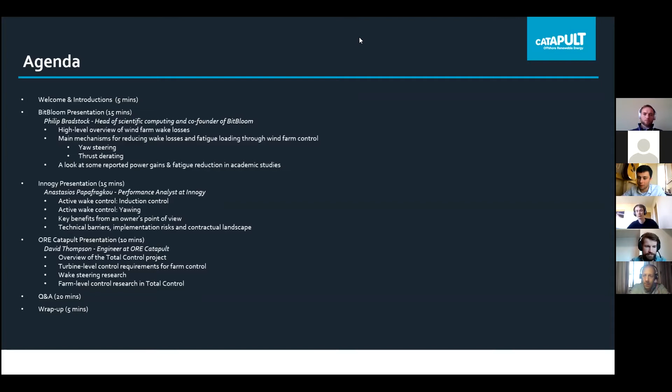Okay, thank you. Hi everyone, good to be talking to you today. Hopefully I just hope to provide a little bit of insight into wind farm control from the point of view of an SME, and more the modeling side of it.

So firstly, just to introduce ourselves - who are we? We're an SME, so you might not have heard of us before. We actually come out of the merger of two even smaller companies, Simmovation and Lindahl Limited. We provide a range of stuff, from software consultancy to operational data analysis consultancy. On the operational data side, we're doing a lot of SCADA analysis and performance monitoring, yield assessments, and some automated analytics and condition monitoring. On our software consultancy side, we're doing quite a lot of modeling in the wind industry, aeroelastic modeling and also wake modeling, helping companies with their numerical modeling and software that they incorporate into wind energy and other renewables.

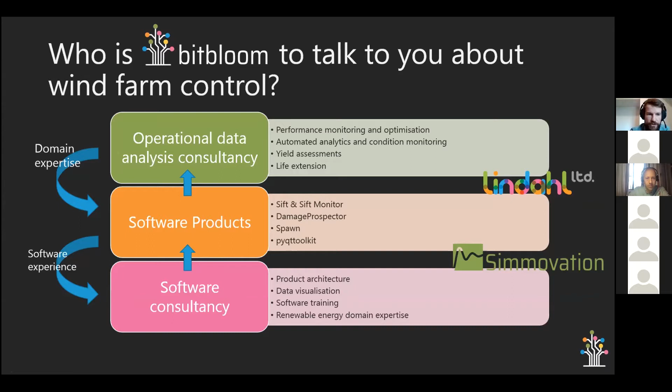So firstly, I just want to give an overview of what wind farm wake losses are, to sort of identify the problem before we try and solve it. When you have operating turbines in a farm, they extract momentum and energy from the wind. And this has the effect that turbines that are directly downstream of those turbines that are extracting momentum and energy will then have less momentum and energy in the wind, due to a reduction of the wind speed.

It's still generally beneficial to locate our turbines fairly close to each other for things like cable costs, and maybe just generally the land you own, or the depth of the seabed, or other environmental factors like that. This means you end up having wake losses that reduce the power in your farm, and the closer the turbines are together, the less power you will have as a collective, or the larger your wake losses will be. Depending on the layout and spacing of your farm, wake losses are typically somewhere in the region of 5 to 20%.

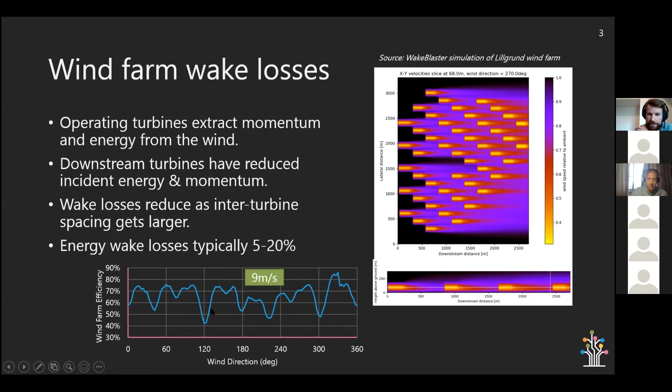But before we go on to wind farm control, I'll just talk a bit about wake modeling and how this is done, mostly for energy assessments at the moment. So when we do wake modeling, usually this is done based on 10-minute average steady state conditions.

So what we do typically with wake modeling is we model at this sort of 10-minute level, and what we call turbulence, we absorb into that wake modeling and absorb it into some statistics, like standard deviation and so on. Aeroelastic models, by contrast, have to model at the high frequency end and see their reaction to the turbulence and so on, and the impact of that on loading.

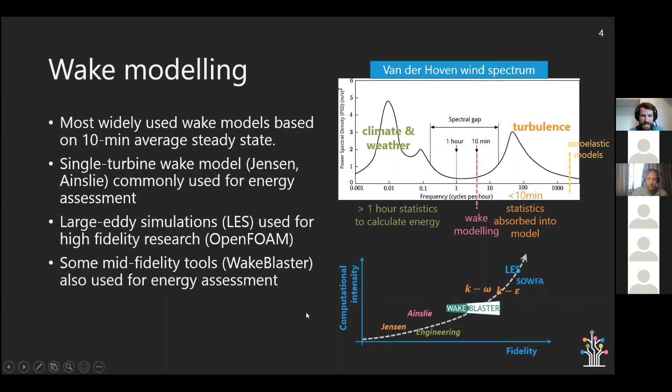And there's also some mid-fidelity tools that model the wake of the whole wind farm together, but are less intensive than LES. WakeBlaster is one example of that.

...reduce the thrust of the upstream turbine. Firstly, I'll point out that the strength of a wake is proportional to the thrust coefficient, or the proportion of momentum you extract from the wind is essentially proportional to the thrust coefficient. So if we reduce that thrust coefficient, we'll reduce the strength of the wake.

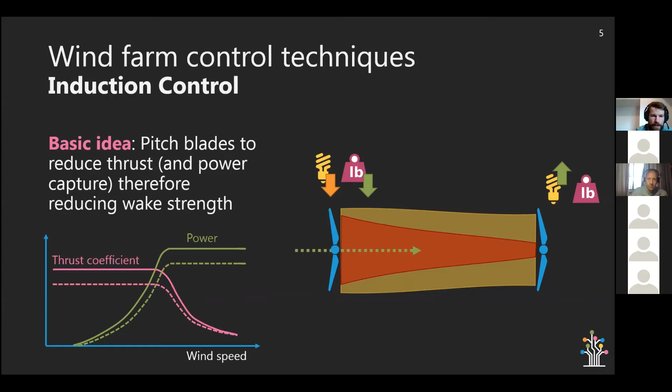So the other main technique, which is becoming more and more the most promising technique, is called wake steering. The basic idea here is that if we yaw the upstream turbine, we can steer the wake away from the downstream turbine based on their relative location to the wind.

So we have a reduction in energy of the upstream turbine due to it no longer being front-on to the wind, and this also ends up being an increase in loading on that rotor—an increase in periodic loading.

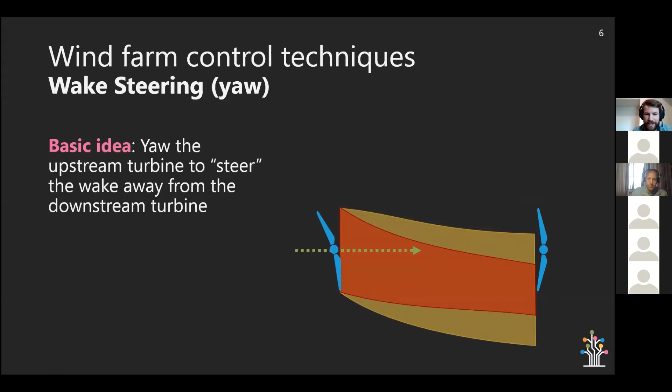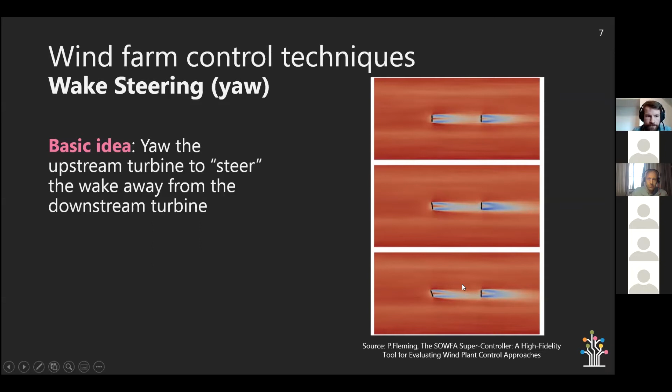Rather than modeling at this 10-minute level to accurately model our wind farm control and see the effects of that, we're looking to operate our controller at a smaller time scale than 10 minutes. For wind farm control, we want to capture the main parts of this turbulence and these large scale eddies, and model this meandering, as opposed to this time-average view which has those statistics incorporated into it.

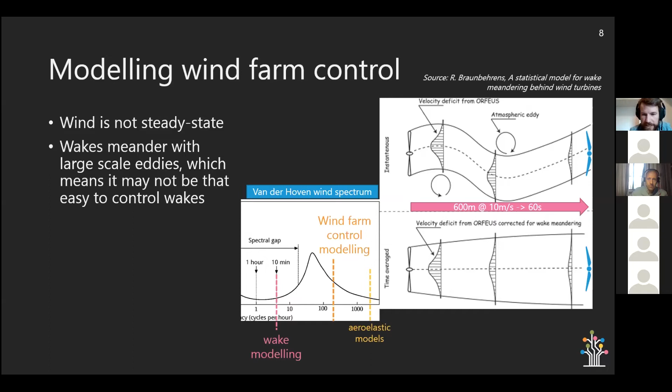We also have to think about the transfer of information. If you consider two turbines, say 600 meters apart, which is fairly typical, and the wind is at 10 meters per second, you're talking about 60 seconds for certain air particles to go from the upstream turbine to the downstream one. So the time lag in this information, the time lag of the wind passing from one turbine to the other, is tricky to incorporate into your modeling and has to be considered rather than thinking of things in steady state.

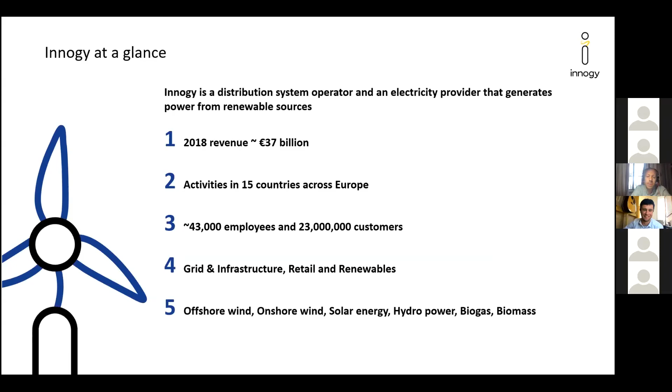Specifically for renewables, we have assets in offshore wind, onshore wind, solar, hydro, biogas and biomass. This is just a snapshot of our operational fleet: 4 main wind farms in UK waters and another 2 in Germany. I've also included a few projects, so the portfolio, the fleet, is expected to grow significantly over the next few years.

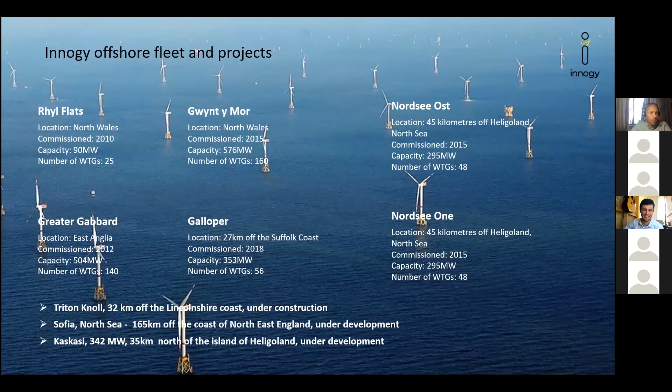I come, as I mentioned earlier, from the asset integrity and performance team. A few words about my team: our main role is to review the SCADA data, vibrational data, and oil and grease data, and we try to analyze the data and identify any issues we see on our fleet, on our turbines.

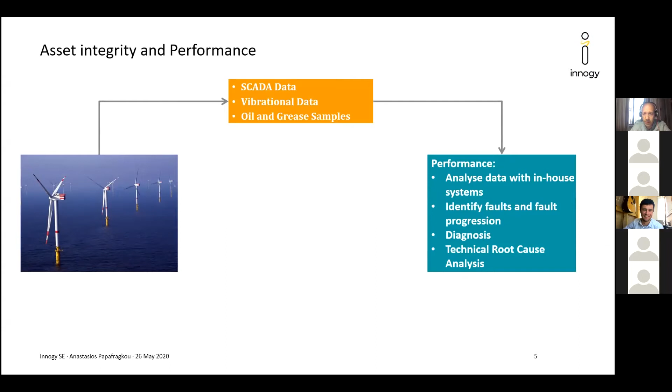We perform a diagnosis, or if we have a failure, we might perform a technical root cause analysis. We feed all that information to the site teams, who are responsible for carrying out further investigations if necessary on site. By working with the site teams, we aim at improving the reliability of our wind farms and the availability of the turbines in order to maximize revenue for the organization.

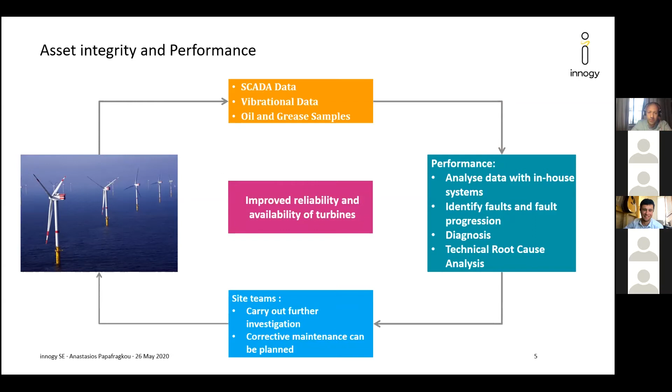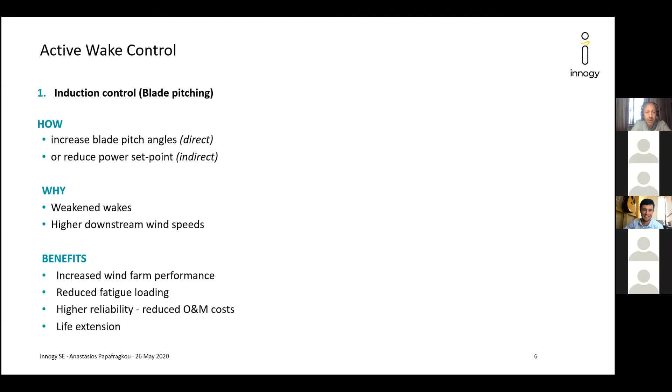I have a couple of slides describing what wind farm level control means. Philip, I think, explained it quite well, so I'll go through these very quickly. One approach is by pitching the blades, as Philip already explained. Why do we do that? In order to weaken the wakes that the downstream turbines perceive, and effectively by doing that we achieve higher wind speeds and lower turbulence for the downstream turbines.

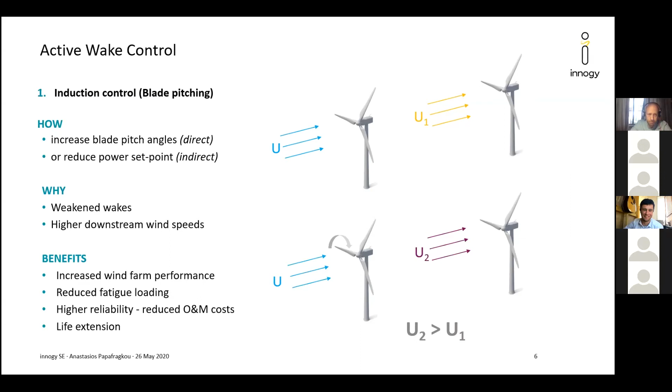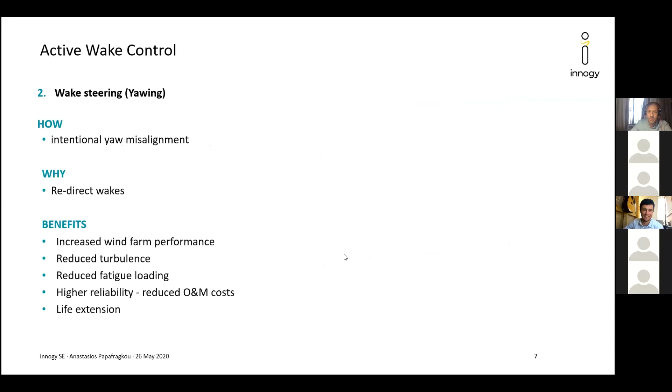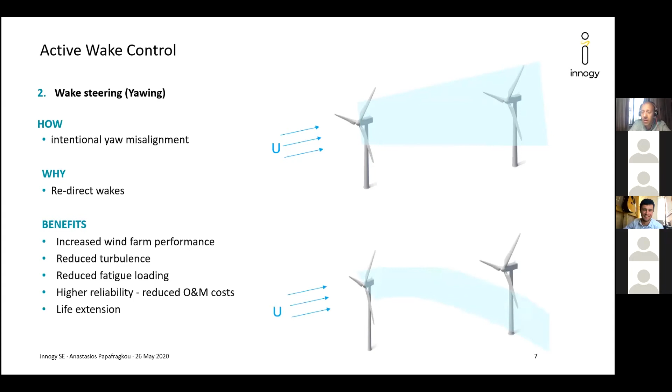A second way of controlling the wind farm more holistically in order to maximize the AEP is by intentionally misaligning the upwind turbines. The objective of this approach is to redirect the wakes. As Philip explained earlier, this is the business as usual case where a downwind turbine is behind the turbine at the front, and it's heavily waked, as you see on this image. But if we intentionally misalign the rotor of the upwind turbine, then we redirect the wake, and the turbine behind it is not as waked as under normal operational conditions.

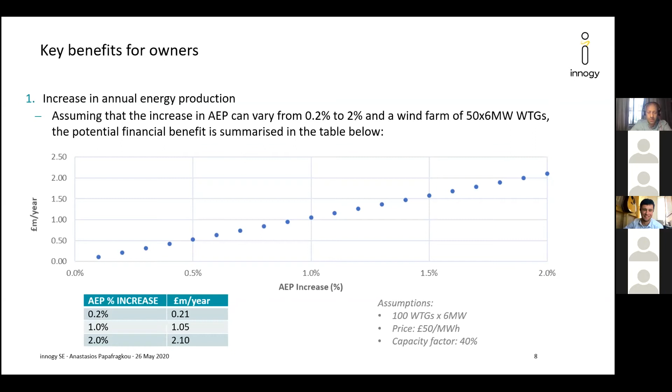If that increase goes to 2%, then obviously the increased revenue goes even higher, up to 2 million. This is a very rough calculation, just because I wanted to give people an idea of how such an approach translates in terms of revenue for a project, for a wind farm.

So the main benefit would be obviously increasing AEP, and the second benefit is the potential reduction of fatigue and extreme loads. This unfortunately is not always the case, but hopefully the sum of loads for the wind farm would be less. For example, in the case of yaw misalignment, we might see increased loads for the first turbine that we misalign by a high number of degrees, but at the same time reduce the wakes, so the turbines behind it should be perceiving less turbulence, therefore less wakes and less loads.

Reduced loads for us as an owner, as an operator, means that we should be seeing in the future increased reliability of our wind farms across our fleet, which translates to less failures, less maintenance, less spare parts, therefore a lower OPEX. Another benefit could be that less fatigue for certain components could translate to lifetime extensions, though this is something we would need to assess at a later stage. And of course, lower loads could also mean leaner design for certain components that should hopefully translate to lower CapEx.

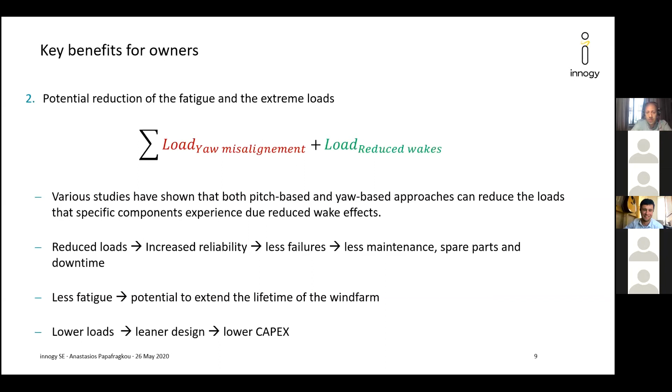Another benefit could be the optimization, the better optimization of the layout by using these holistic control strategies. At the moment, we don't do that, so the layout is designed in the traditional way, without taking into account such strategies. However, if we did, we could potentially end up with a denser layout, meaning less cables, a smaller footprint, and sometimes the footprint is a restriction. So that could be a huge benefit if we could fit more turbines using the same space.

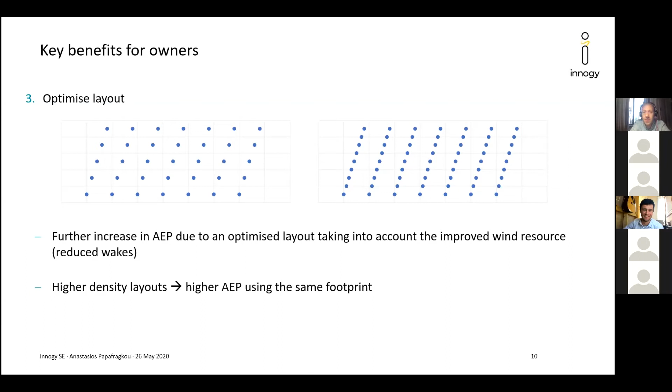I try to list a few technical barriers I could think of. This is more of a brainstorming, to be honest. But from my point of view, I try to review the literature and some of the work that has been done, and I realized it became very quickly apparent that all the models looking into these sorts of control strategies are quite complex, and it seems quite difficult to validate the output of these models by means of having actual experimental data.

So that could be a problem, that we implement these sort of algorithms and we expect a certain increase in AEP, but we don't achieve that.

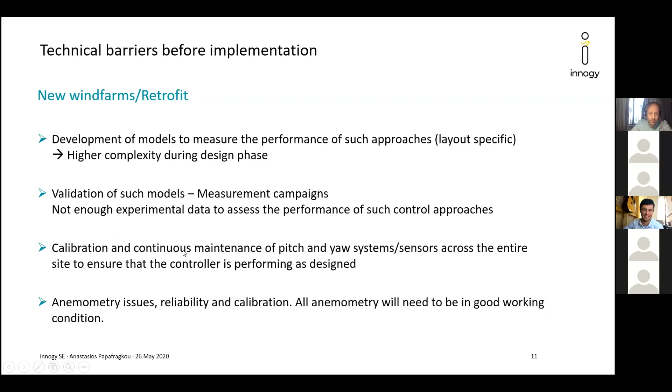Another technical barrier is that we would need to continuously maintain and calibrate the pitch and yaw systems and sensors, as these strategies rely heavily on either of these systems. The same goes with the anemometry - it would have to be calibrated and kept in good working order in order to perform this strategy, to implement this strategy.

Specifically for wind farms that don't come with these controllers pre-installed, but we do a retrofit, there are some more technical issues to consider. For these turbines, for these wind farms, we would have to upgrade the controller. Of course, for that to happen, we would need full engagement from the OEMs, as owners, as operators. We don't have the permissions, first of all, to do anything with the controller, especially during the period when the wind farm is under warranty. But even after the warranty period, we wouldn't have the knowledge to do that. So in either case, we need full engagement from the OEMs.

And in order to monitor and assess the performance of these strategies, we might need to install additional monitoring equipment. That could be LiDARs, in order to measure the wakes, or it could be strain gauges and accelerometers to make sure that the turbines don't perceive high loads and don't exceed the designed envelope.

And the last one is that we would probably need to adjust the operating conditions for critical components. For example, the yaw brake pressure would have to be adjusted in order to cope with excessive yawing misalignment, if that is required.

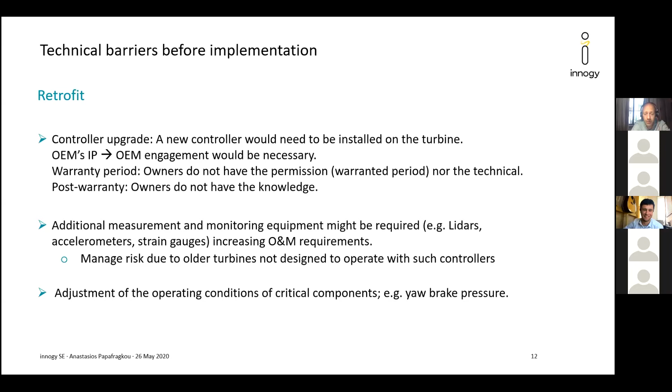Then if we move on to the implementation phase, some of the risks I try to put together. The very first one I thought was anemometry. Very often we see issues with the anemometry. Of course, we can't avoid that. This is something we will be seeing during the implementation of these strategies, and that could be an issue, a problem.

Then another risk is the pitch and the yaw calibration. That would have to be performed across the entire site, and beyond the initial calibration, we would have to make sure that these sensors or systems do not drift away with time. For example, in some cases we have observed that the yaw sensors might drift away with time. So this is something that we would have to monitor continuously and correct any issues if we see any.

And the last one is that the main components that will perceive an increased duty will be the pitch and the yaw systems, and this might have a knock-on effect on some of the subcomponents of the system, such as, for the yaw system, the pinions, the yaw gearbox, brake calipers, or any other subsystem that experiences very high strain.

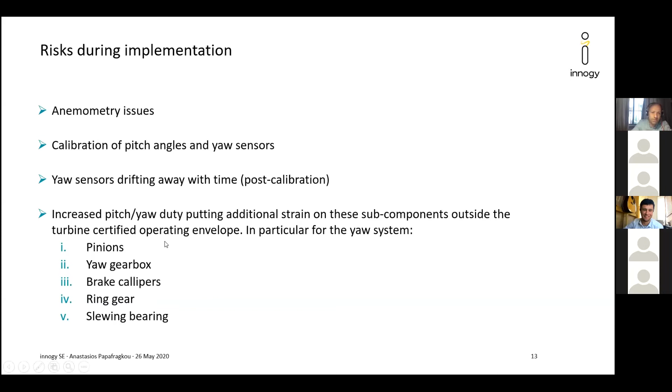Another issue to consider is the additional downtime we will perceive due to technical standbys. A good example is cable unwinding. If we have increased yaw duty, we might have an increased number of cable unwinding events at the same time, and that would cause additional downtime for us.

Specifically for the yaw duty, we might also perceive an increased own consumption. A very rough calculation I did was that roughly a 40% increase in yaw operations could reduce AEP by 0.1%, which is quite significant when you compare it with the benefit we might see from these improved control strategies.

In the case we have high loads, we might see a higher failure rate across the fleet, at least for those subsystems that have increased duty, such as the pitch system and the yaw system. I have to admit the impact on the loads for the turbine, the tower, and the foundation was not exactly clear to me, so there are some concerns about what the impact on the foundations could be.

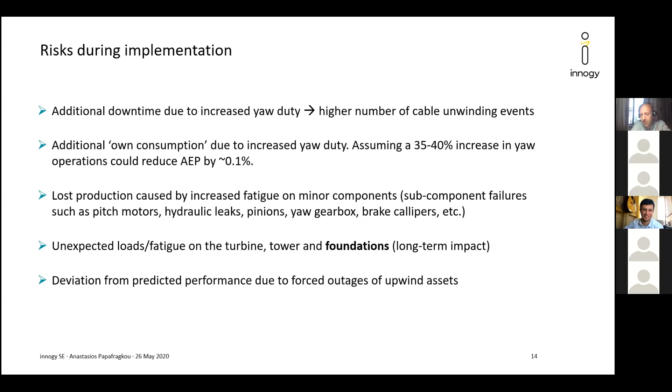Another risk during the implementation phase could be an increased number of failures, and that could affect the way the strategies work. For example, we might have an upwind turbine that has failed, and therefore this would affect the way we operate the downwind turbines.

A few words about the contractual landscape of such improved control strategies, which is probably the biggest barrier at the moment in my view. I try to split that into two categories: the contractual landscape for existing wind farms is slightly different to new wind farms. I'll start with new wind farms because things are a bit clearer here.

These strategies, I wouldn't expect them to be warranted at the first stage at least, so this extra yield wouldn't be warranted by the OEMs. At the same time, such strategies would add complexity to the existing contracts, to turbine supply agreements and service maintenance agreements. These are quite complex contracts already, and including this sort of improved holistic control strategy would be an added complexity probably.

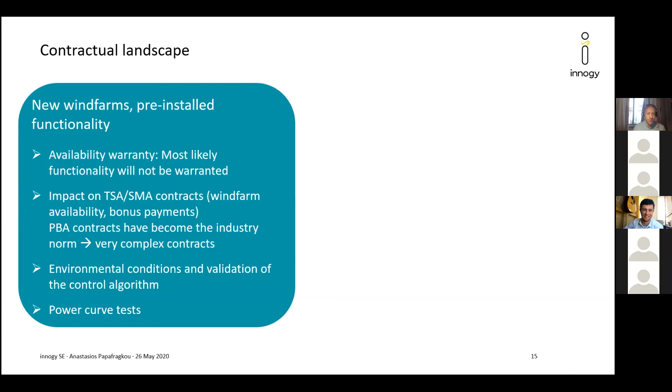If we are talking about a retrofit to existing wind farms, the main risk I see is reliability. The question is, how do we split this risk between the OEMs and owners? Again, we would need an agreement between the two parties to split that risk.

When it comes to warranty for an operational wind farm, if that wind farm is under warranty, then I don't even see it possible to happen. Again, we would need full engagement from the OEM because we would need to upgrade the controller, and this is something we wouldn't be allowed to do. And for wind farms not 100% owned by one party but with shared ownership, things become a bit more complex because you would need the agreement of all the shareholders involved.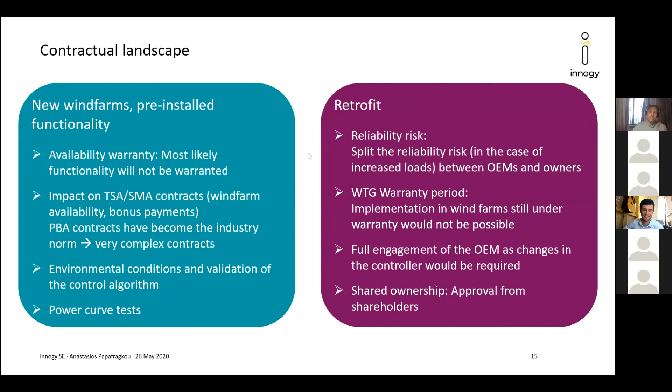And that was it. Thank you.

Yep, that's coming across great, thanks.

I'm going to talk a bit about the Total Control project and what that covers, and its approach to wind farm control, and this idea of the farm as a power plant. I'll have a quick look at some of the turbine level control requirements for the farm control, and then a little bit at the end about some of the work we're doing on wake steering.

So Total Control is a 4-year project. We're about halfway through, or just over halfway through. There's 4.9 million euros of funding through Horizon 2020, which is split between the organisations you can see on the right there.

So the goal of the project is to move away from the individual optimization of wind turbines to optimization of the plant operating as a whole. So 3 points to that are maximizing yield, so generating as much power as possible, reducing operating costs through reducing loads, mainly fatigue, on major components of the wind turbine, and enhancing capability. So this is ancillary services, usually. Things like grid frequency support and things like that.

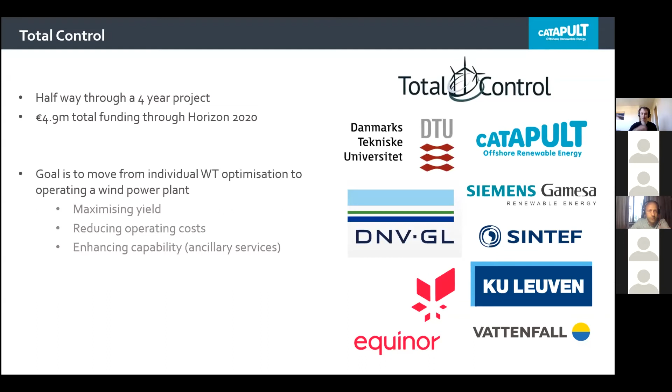Now, Philip mentioned the Van der Hoven spectrum before in his presentation, and how different features of the wind are split across different sort of time scales. This is sort of an expansion of that. So that column in the middle is really a list of physical features of the wind farm and operator decisions that kind of go along with that, and rough timescales on the left-hand side.

So at the longest timescales, you have things like O&M scheduling, which happens on year, month sort of schedules, getting ships out. It's quite a slow process, so things are planned far ahead.

With farm control, we're looking at optimizing the operation of the wind farm to sort of coincide with this sort of operation. So part of the Total Control project has cost modeling of how these O&M scheduling events can coincide with how load is balanced across the wind farm. And that load is balanced across the wind farm by doing the things that the two presenters before have talked about, things like yaw wake steering and induction control.

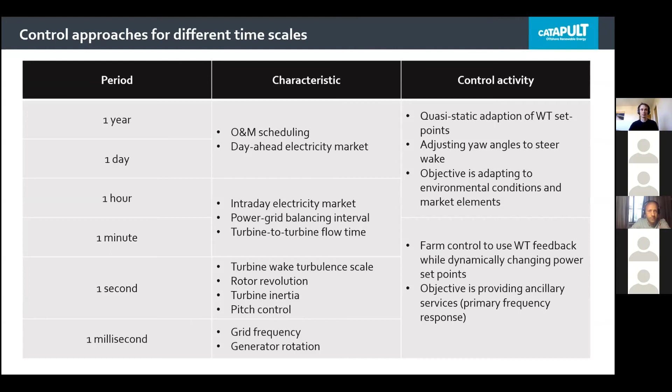So we're looking at different farm control, different individual turbine control operations that can be done at those speeds. So primary frequency response obviously can be at the millisecond level, so it needs to be done in a way that can respond to that quickly. Okay, right, so I'll move on.

Now, just to outline the sort of thing that's happening at these longer timescales: increasing plant power output by yawing and induction control, the same as what I was talking about before. The task of the farm controller here will be to pick which turbines to do this with.

Traditionally this is sort of explained as the front row of the wind farm even yawing to increase the power output of the turbines behind it.

Now, the farm control needs to be a bit more advanced than that. You're selecting the turbines to yaw, control induction, things like that, by things like the turbine history, inspection reports, and also the current operating point of the turbine.

So if some turbines in the farm are generating more power than others, for example, they might be better candidates to reduce the power off on a farm level. In the future, this sort of operation might be expanded to include things like condition monitoring in real time, and this will allow turbines with more severe load histories, or turbines which condition monitoring think are likely to experience a failure soon, to have the loads reduced in advance of any failure happening.

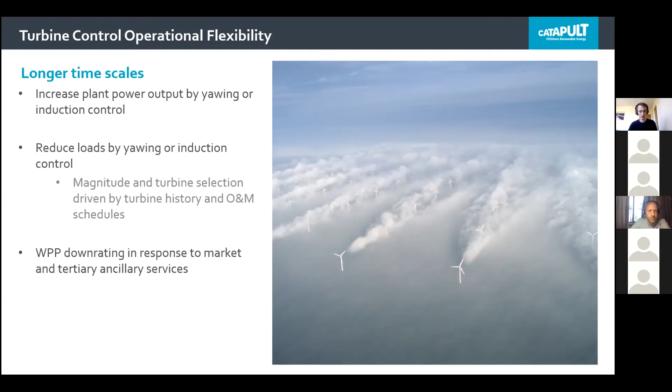Okay, so moving on a bit to the shorter timescales now. As I said before, we're looking at things that are happening on the less than a minute timescale. We can still reduce loads by yawing induction control, but the magnitude of that load reduction and the turbine selected.

We're more likely to be driven by local measurements. That might be through the turbine operating point itself, or it might be through a LiDAR on the turbine itself. But the point is that it's not done on this lower frequency level that we were talking about before.

So you have these things happening on the minutes and seconds response, and also the turbine itself - individual turbines will provide these primary ancillary services. The farm will provide the services, but the selection is done at the turbine level - things like fast frequency response and voltage support.

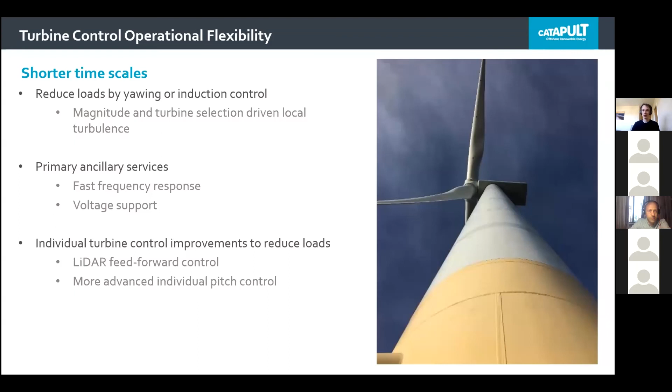Okay, so moving on. This is something that should be happening right now, but has been delayed a little bit because I can't get to site. Now we are going to do a wake measurement campaign at Levenmouth.

This is the LiDAR, fitted to the gantry at the back of the Levenmouth turbine. That's going to face backwards and look at the wake as it leaves the rotor. We're going to do a series of tests deliberately introducing a yaw error, and we can use the anemometers fitted to the turbine, wind vanes, and then the MET mast, situated a few hundred meters away from the turbine, to work out these yaw errors.

And we're going to measure a deficit profile and the center line of the wake as it bends away from the back of the turbine. I've said 1/2 to 2 diameters downwind, but I think we're going to about 500 meters, which is a bit more than that.

So the aim of this is to evaluate the wake steering strategies which will be used in wind farm control. It will also - the purpose of that is to validate the flow models that we have, computational models, and eventually part of the Total Control projects will be tested at Lillgrund, which is operated by Vattenfall.

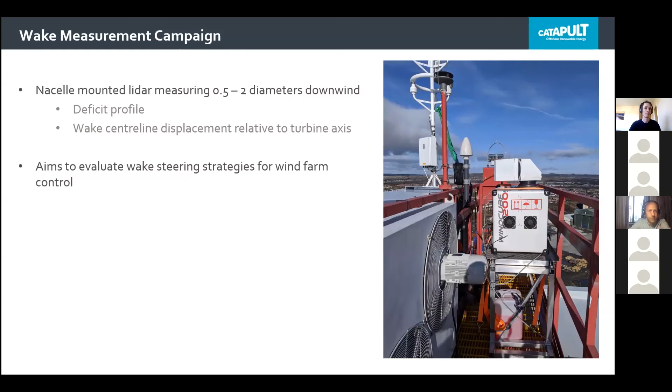Okay, and that's all I have to talk about.

Great, thank you David, it was really interesting. It was only a small part of your presentation, but talking about how you might be able to use condition monitoring in the future to reduce load on turbines that are maybe more susceptible to damage - so it's very good. Thanks a lot.

Yeah, so I just wanted to add to that - an important part of this farm control, and I think Adam Stocks asked a question about it. I've not read the whole thing yet.

The important thing about farm control is that we're asking turbines to do things that they are capable of doing, and condition monitoring will be an important part of that, I think.